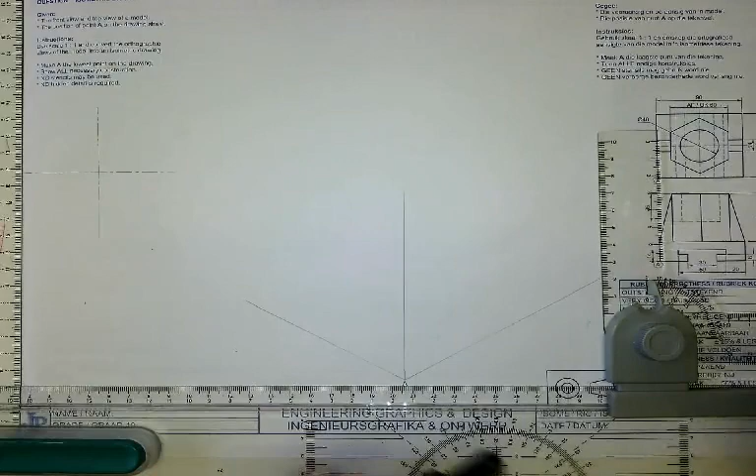Okay, Jean, so we're doing an isometric drawing just for practice exercises. Okay, so they give us a front view and a top view of a model, and then the lowest point, which is A, and it is also our starting point. Okay, I will not be doing the isometric circles, and you guys do not do isometric circles in grade 10. It's not part of your syllabus.

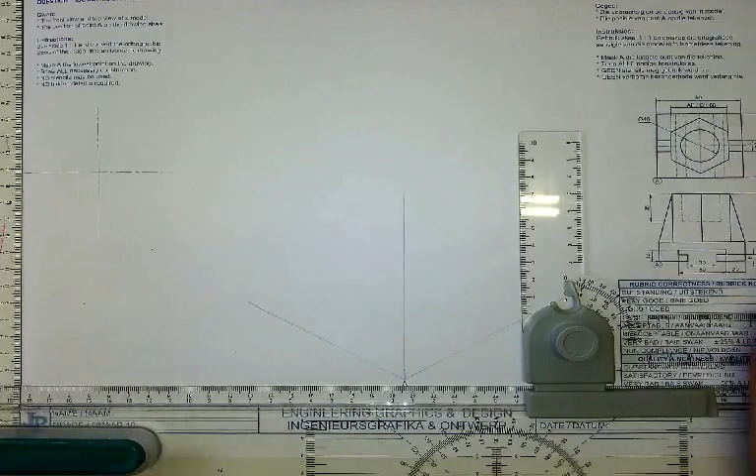Okay, we can see here there's a hexagon, so the first thing that I will do is I will draw an auxiliary view. So they give us 60 across the flats. That means that from the one side to the other side it is 60. That means we can draw a circle of 60, which will then have a radius of 30. So I can do the full one, I can do half, it is going to be exactly the same thing. I am going to, just for the purpose of this drawing, do a full view. And remember, an auxiliary view is always in B types of lines.

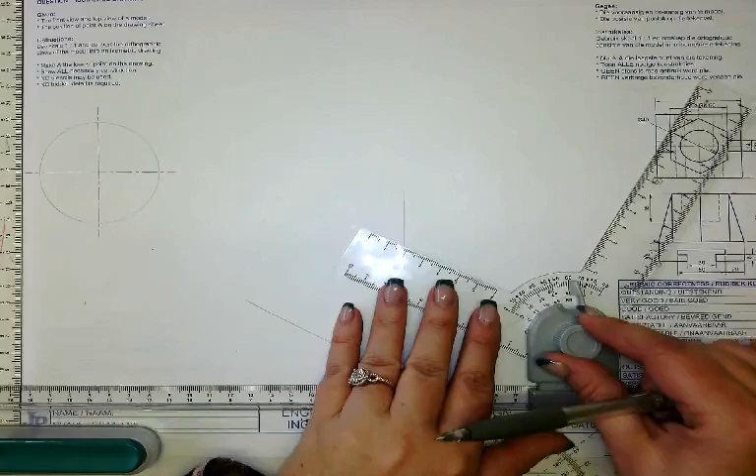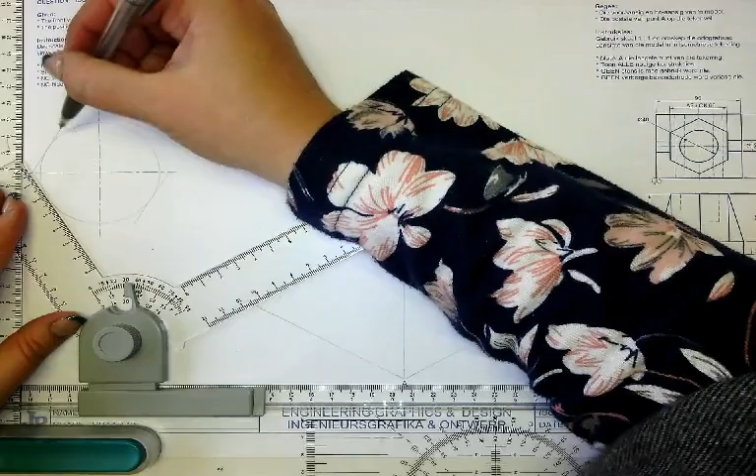Okay, so now I set my set square to a 60-degree angle, because if I take 360 and I divide it by 6, it will give me 60, which is then the outer angle of the drawing that I am working with. Okay. And I'm making sure that my hexagon is touching all the sides of my drawing. Okay, so that is my auxiliary view done and dusted. I do not need to draw anything else on the auxiliary view.

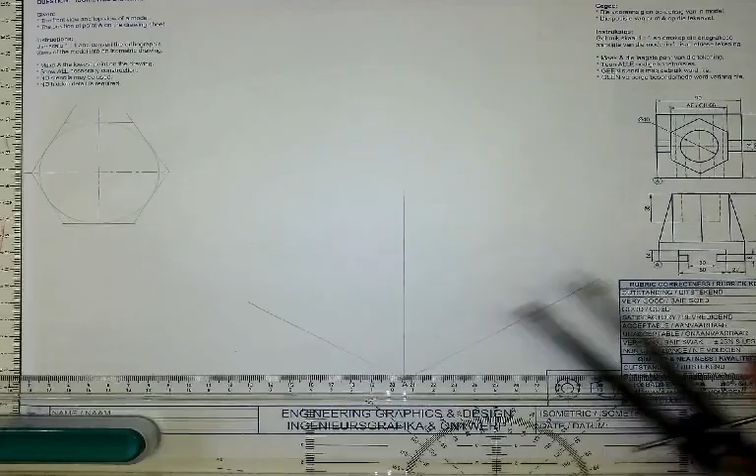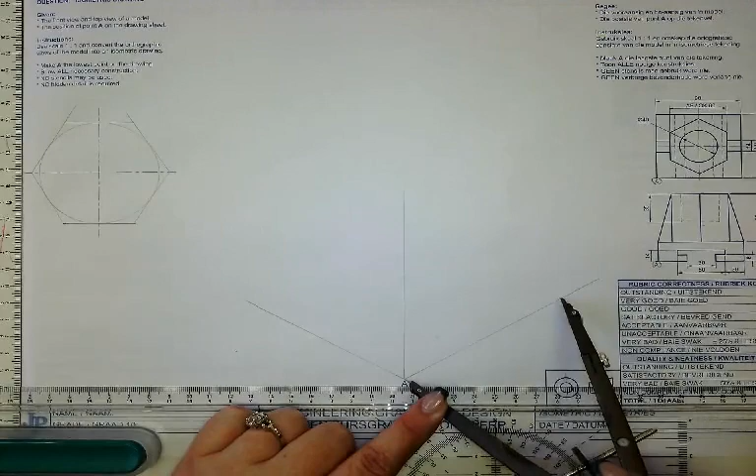Now I'm just going to plot my dimensions. So when I look at my top view, that gives me the width and the breadth. So what is to the right of A will go to the right of A here. What's going to the top of A here will go to the left of A. So I can see that dimension is 90. So I'm going to set my compass on 90, and from A I'm going to scribe 90, and then there I have 80. So then I'm going to set my compass on 80 and I'll scribe 80. I also want my height, which is then 24 plus 60. So that's going to be 84.

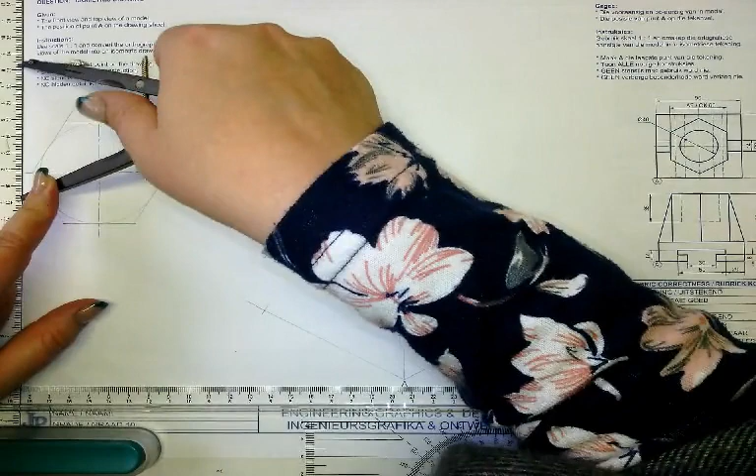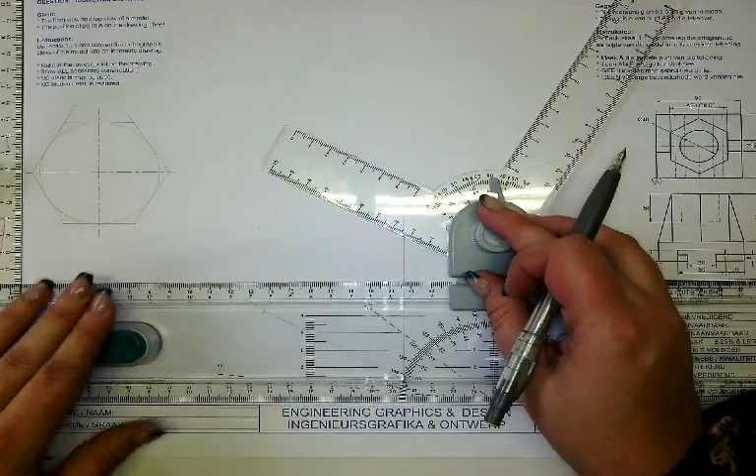And then I will construct my construction for my drawing. Like I say in class, we normally just do a cube, and then we work from there to basically machine out the drawing, if you are looking at why these drawings are actually being done for models and so forth. Okay. Extend that one a little bit.

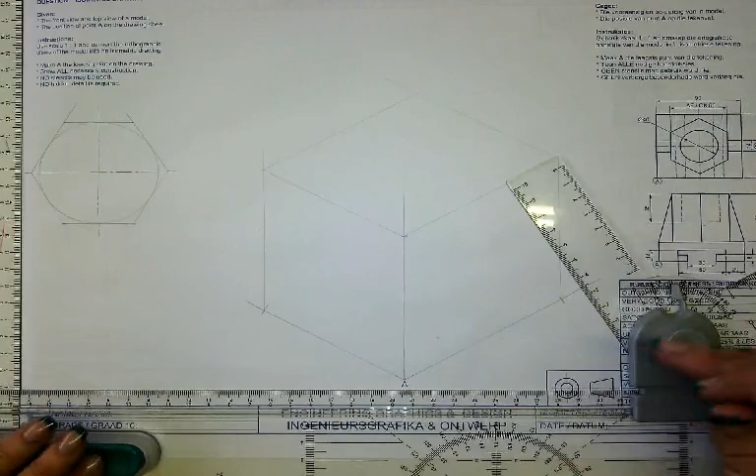And as you can see, I'm always keeping my set square on my board's ruler. I am never ever removing it from my board's ruler. I just move my ruler up and down to where I want my set square. If you don't have the adjustable set square, it's the same thing. You will just be turning your set square so that you can find all the different sides that you need.

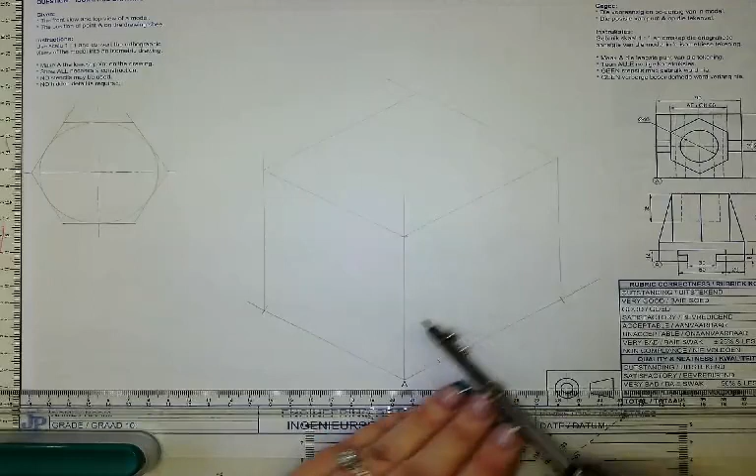Okay, so now I am looking at my front view. I am going to find these distances here. So I have 20 on this side. It looks the same on both sides, so I'm going to scribe 20 on both sides from A. So here I'll scribe 20, and there I will scribe 20, and then they say my middle distance should then be 50. Okay, so that should then now be 50.

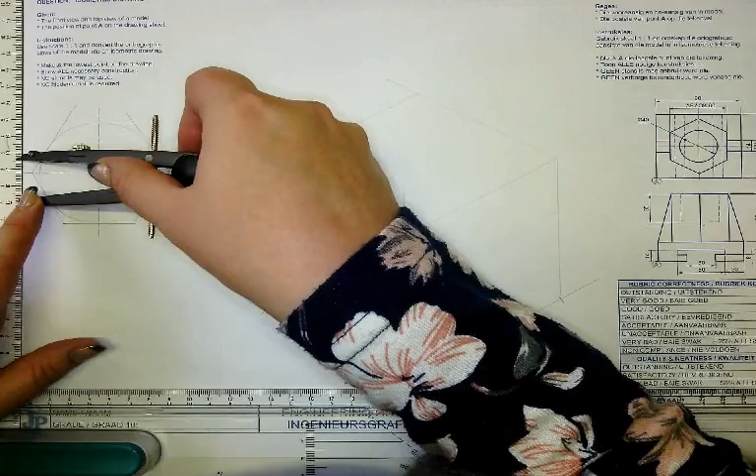Okay, and then they say that right in the middle there it's 30. So I just want to find the middle of this 50, which will then be 25. So there's my middle, and then I'm going to set it 15 to both sides, which is half of 30, since I'm working from the middle here, there and there. And then I basically can now go and find this drawing with my widths.

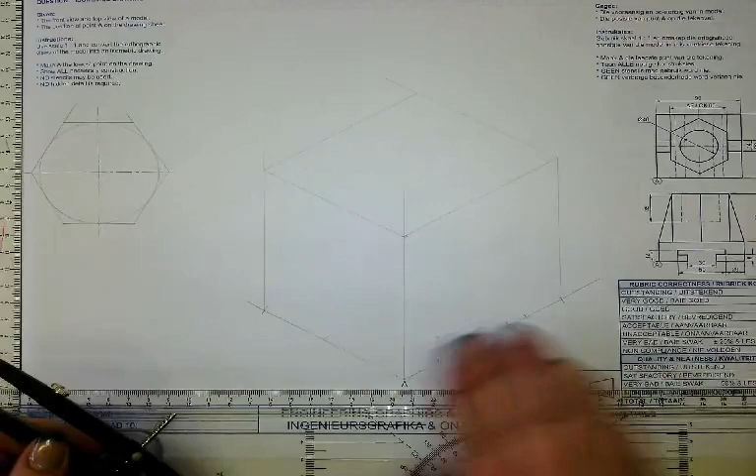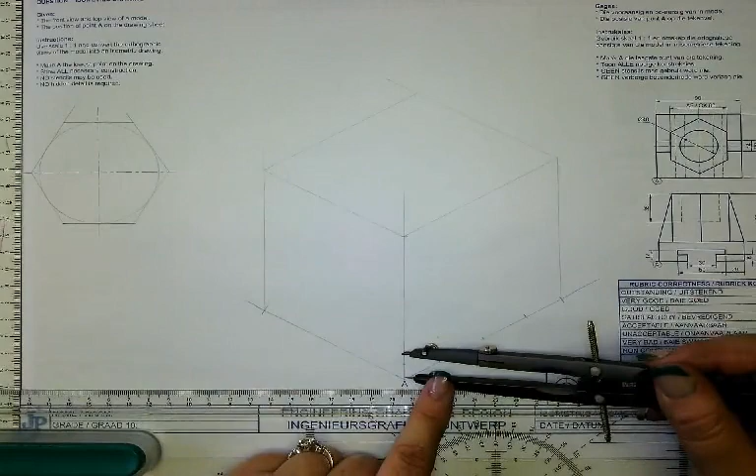I just now need my heights, which I will see here is 14, 8, and I will scribe the 24 as well. So we'll start off with 8. So 8, 8, 14, and 24, which will then leave me with 60 here.

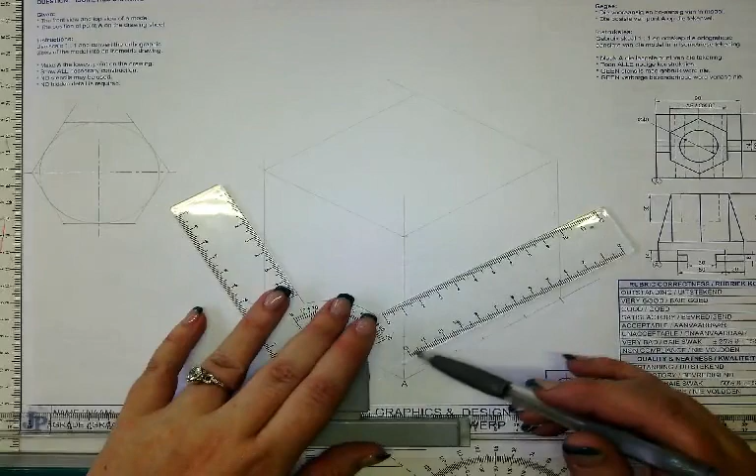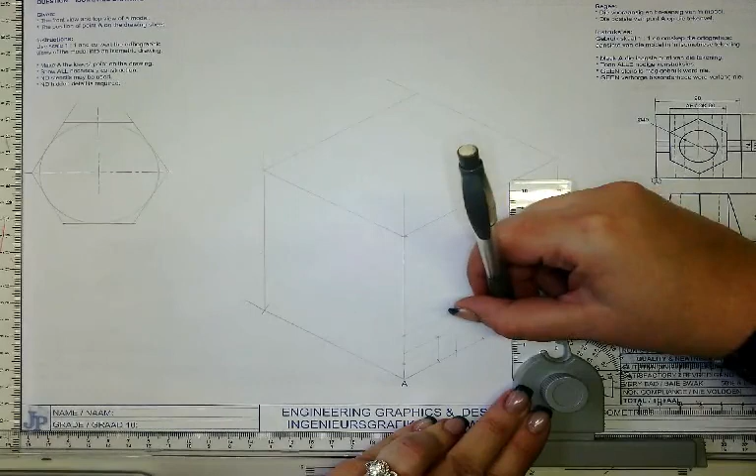Okay, so on my 30-degree angle, project across, project, project, and then I'm going to project my heights here as well. So this one, okay, I can just project up to there. This one I only have to project up to there, there, and there. Okay, so basically what I have here now is my completed view of this drawing. So I will just go and draw it in solid.

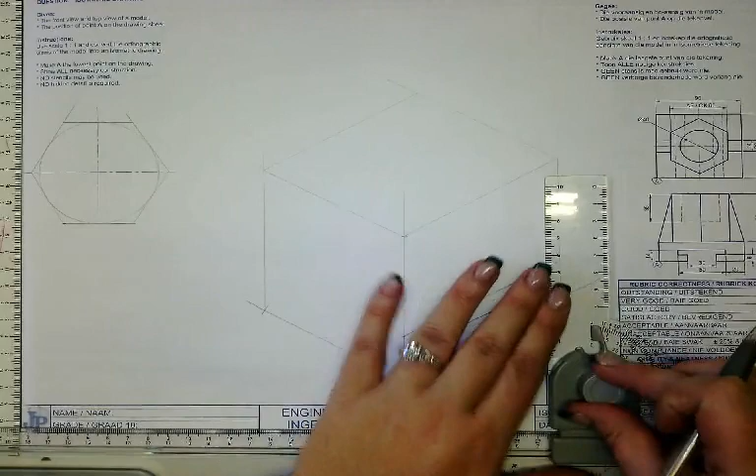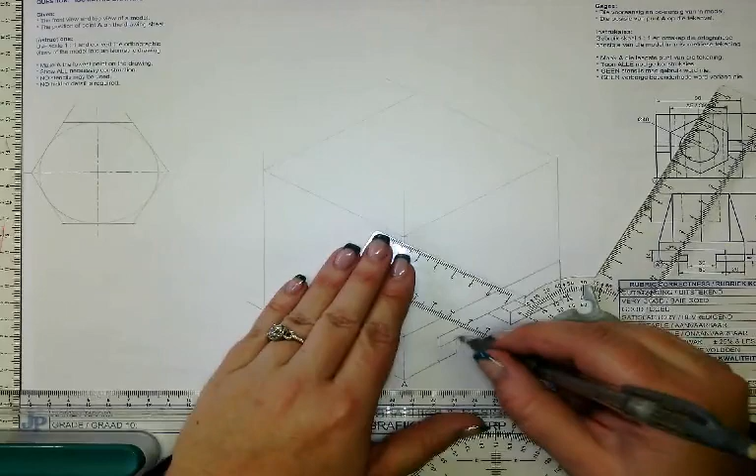Okay, so that side is basically done. I just want to give my whole drawing its depth, which it needs here. So this is like a groove that goes inside the drawing, well, inside the component or the model that we are looking at. Okay, and then that is what I will see. I will also then project this line across that side.

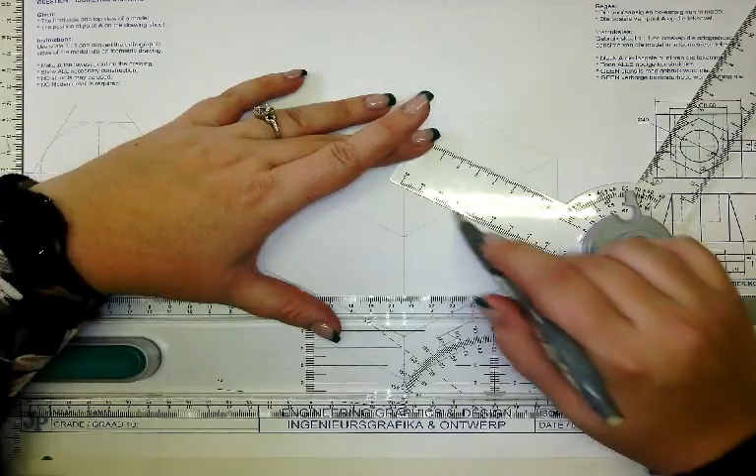So if I look at this drawing, there's no hidden detail here, so this side is just a blunted-off side. There's nothing there. And on this side, I will draw in construction. The reason for drawing in construction is because I'm going to have my hexagon here, and I do not know what I will see and what I won't see. The same with this line, also in construction.

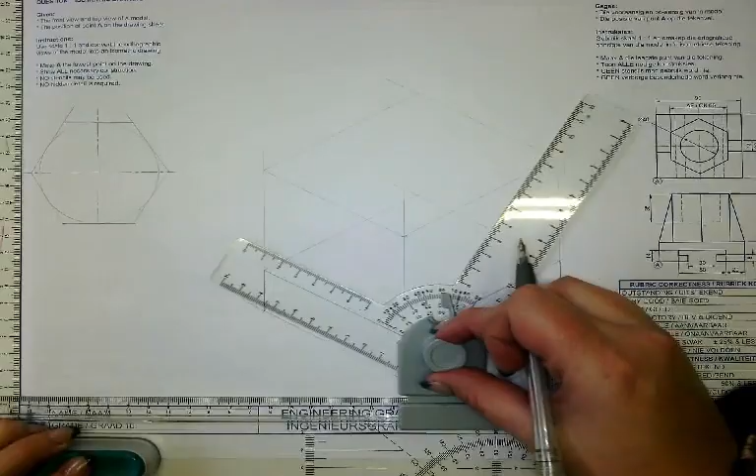Okay, so now what I want to do is I want to find my center lines. So I have already found this center point here. I'm just going to project it across, and then I will be doing it as a center line on my face here of the base that I have. And this center line is representing that center line there as well.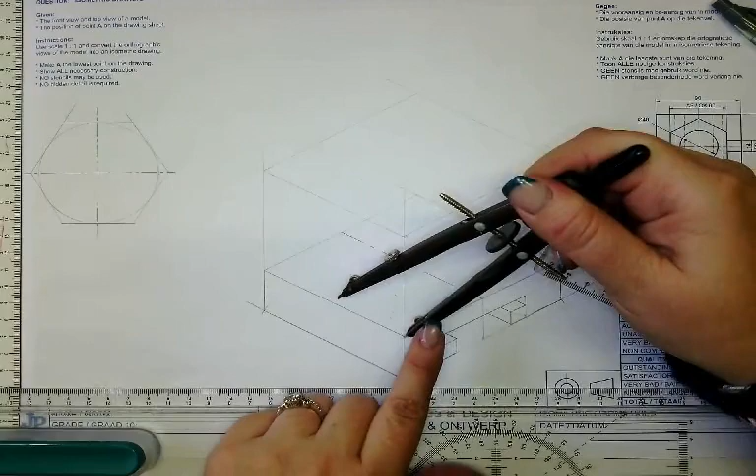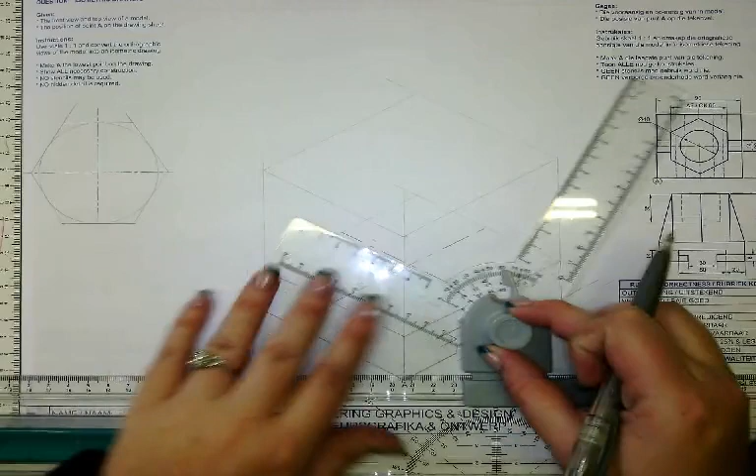I will then get the center of this. I know that that is 80. So half of 80 is 40, and I will just scribe on my face there 40. And to my opposite angle, I will do my center line here. Okay, and I just want them to connect. So I'm just going to draw a light construction line there to know where I'm working from. So this center point is representing that center point.

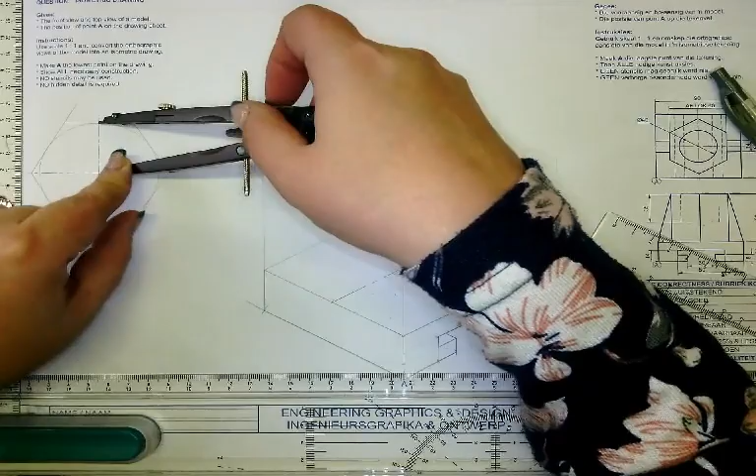I now have to go and look at my drawing. So I'm going to look at where my flat sides are first. They are facing here, so they are on this axis there. Okay, so I'm setting my compass on that distance there, transferring it to the middle like that. Okay, and then I will do my sharp edges of my hex to there, which is on these sides, which is then there.

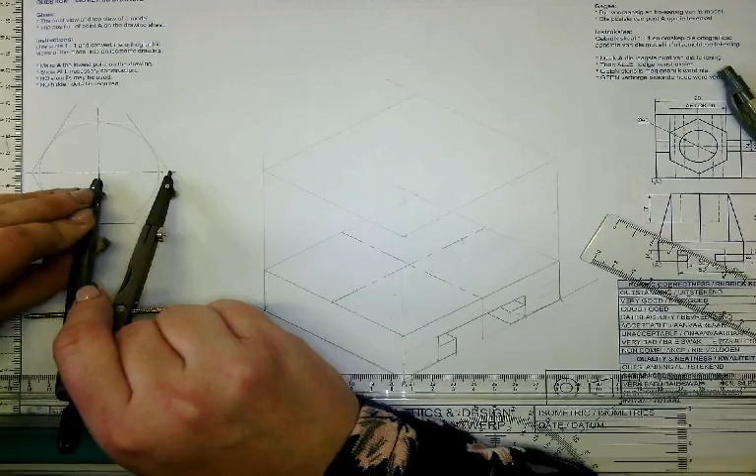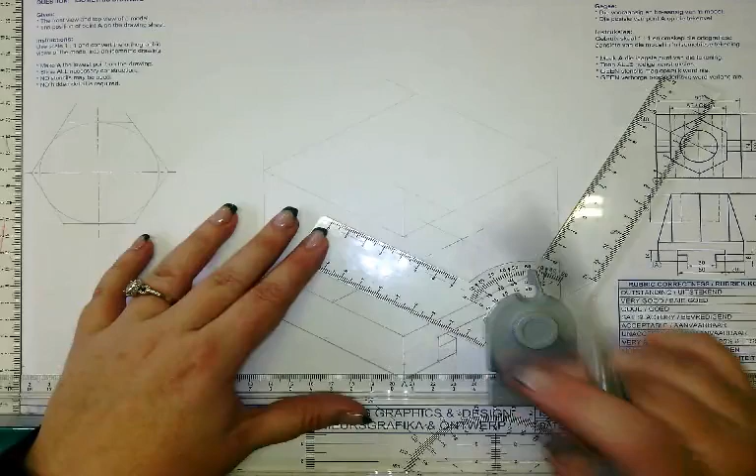Scribe and scribe. Okay, and then I want to just do construction through these points. So construction and construction, and then I want to find my size here. So I'm going to work from my center to the edge, and I will transfer it to both sides. And I only have to do it once. So there and there, and then I'm going to project it across to the opposite side, so to my opposite construction, like that, and this is my hexagon.

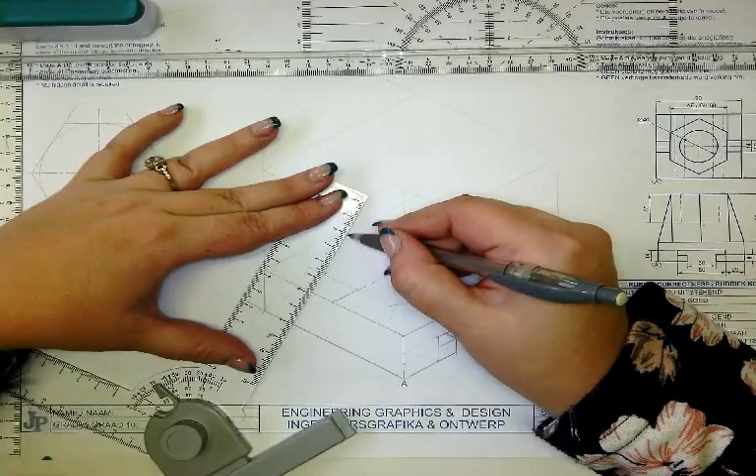So now I can go and I can construct my hexagon. So I won't do my hexagon in solid yet, because I do not know what I will see and what I will not see. Okay, so just constructed in construction type of lines. There is my hexagon.

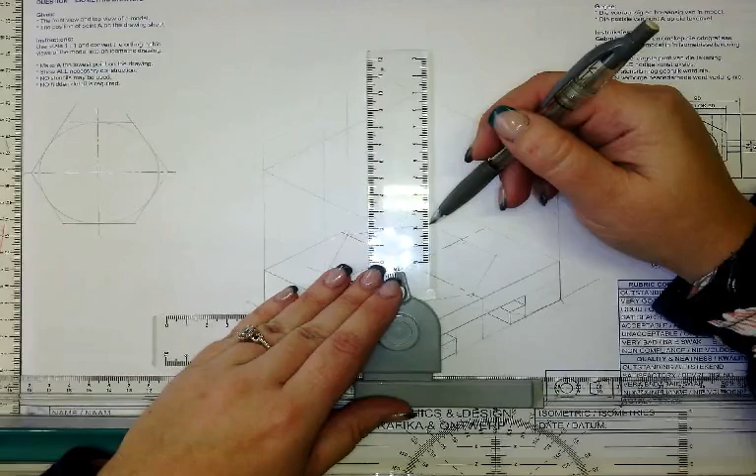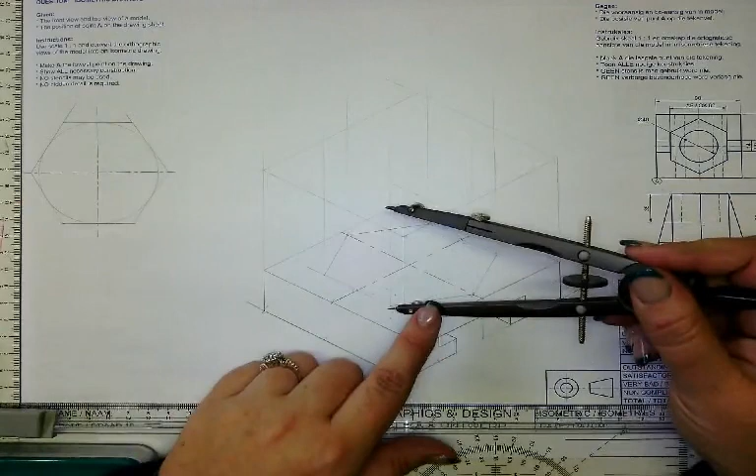Okay, so now I need to give my hexagon height. So I'm going to project all 6 points of my hexagon to the top. Any distance. This is not a set distance yet. We are still going to determine the distance. So I projected them all to the top. Then I'm going to look at my height here. They say it's 60. So I'm going to set my compass on 60, and I'm going to scribe on all 6 of my hexagon's sides. I will be scribing this 60.

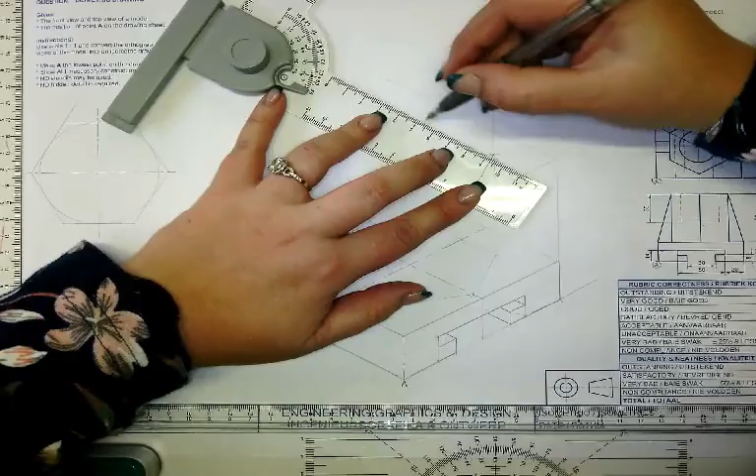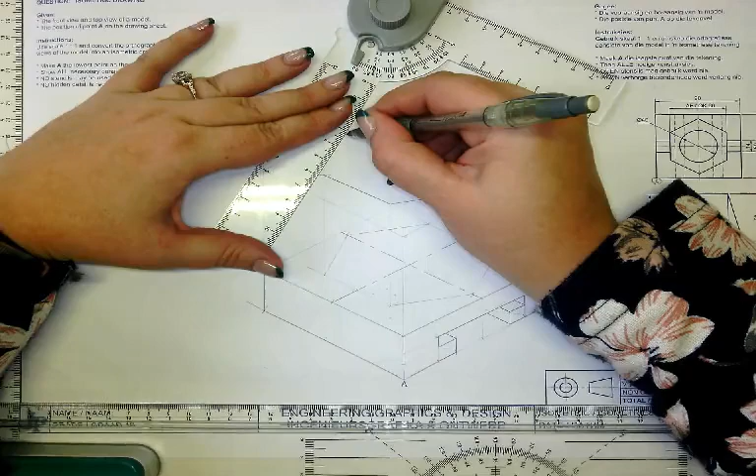And then at this I can now go and draw in solid, connecting all my points the same way I did at the bottom, but these ones I will do in solid, because I know this is at the top and I will be able to see this. There. Okay, so now I have 2 ribs. They are on my flat sides.

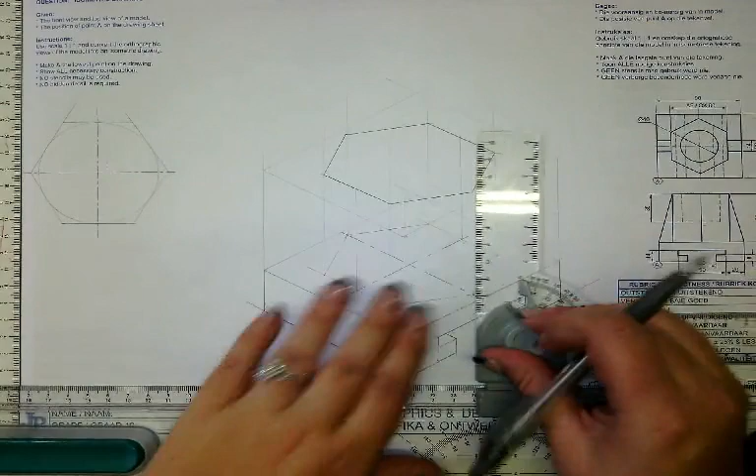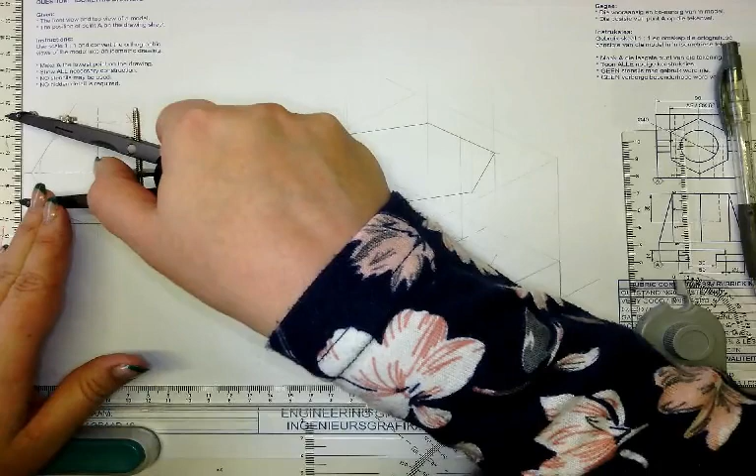So basically I already have my center lines where I'm working from here. So I'm just going to project my center line to the top. The same here, I'm going to project it to the top of my hexagon. I also just want to extend my center line here, because I might see, no, you're not going to see that. So that line I should be able to draw in solid. Okay, so they say that this is then 14. So half of 14 is 7, and I'm doing 7 because we're working from a center line. So here I will scribe 7 to each side, and here I will scribe 7 to each side.

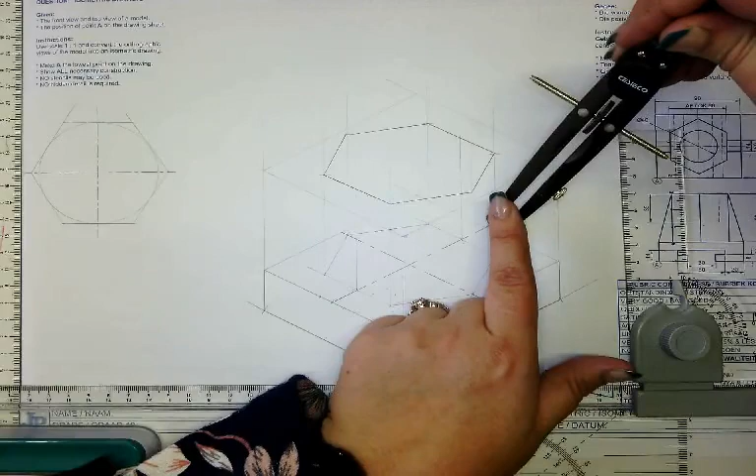I will also do the same here just to see, maybe I will see my rib. Yeah, we are going to see a little piece of the rib. Really not a lot. So now I will just go and combine them first in construction. So in construction, that point and that point. And the same on this side, the 7 to the 7 and the 7 to the 7. These ones I'll draw in solid because I will be able to see them. So solid and solid. And then just this little piece here will be solid there.

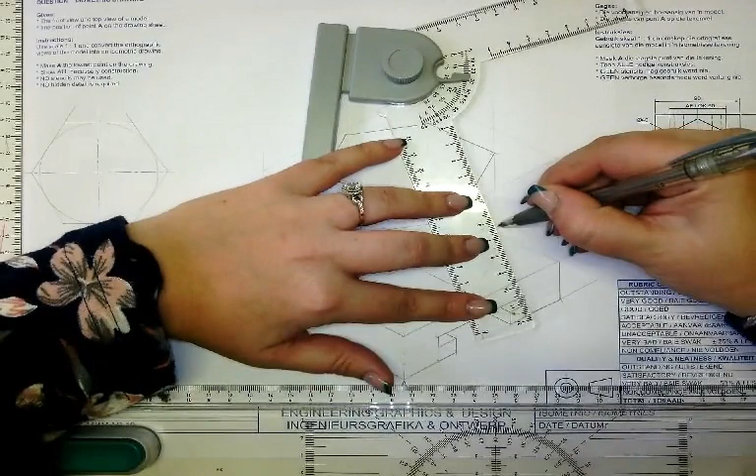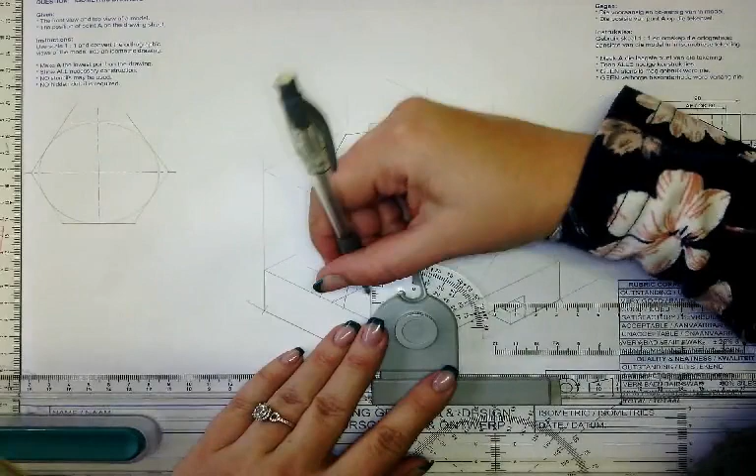This line will go down there. Okay, and I can project this rib straight onto the bottom of my hex here, set my set square on a 30-degree angle, connect them, and then also here just connect that little bit there, and you see that's the only part of the rib that you will see.

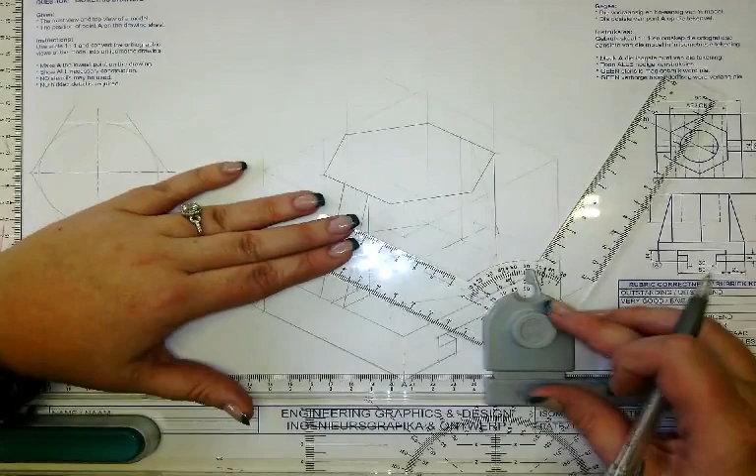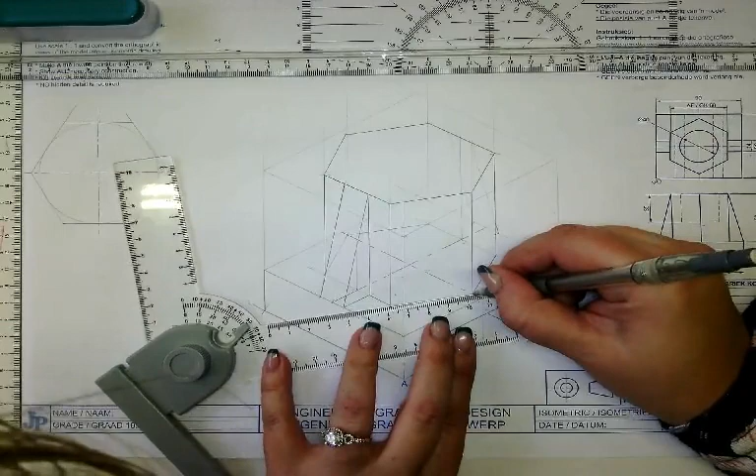So I will just now complete my hex at the bottom in solid of what I'm going to see and what I'm not going to see. So I will only see the following here. There. And there. And then I'll just connect this line solid up to my hexagon and also this one, but only up to my rib. Okay, gents, so there is your drawing completed.